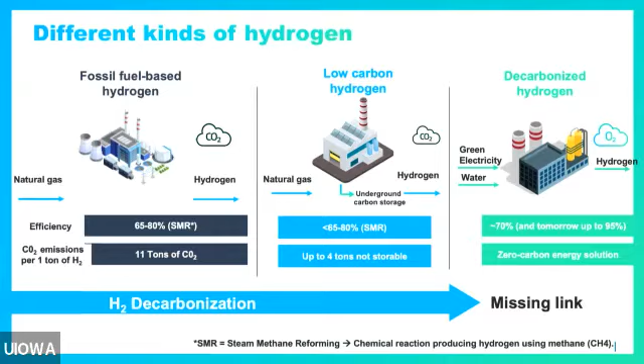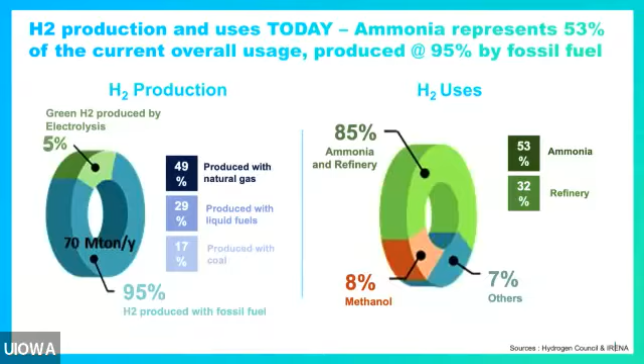So in a nutshell, if you want to easily decarbonize a part of the industry, a way to do so is to use electrolysis instead of fossil fuel to produce hydrogen in order to produce ammonia. This is what we are going to see in the next slide. Just for you to know, the production of hydrogen to produce ammonia represents more or less 1% of total CO2 emissions worldwide. It's only 1%, but still it's big numbers. I'm going to skip this slide because it will not bring a lot.

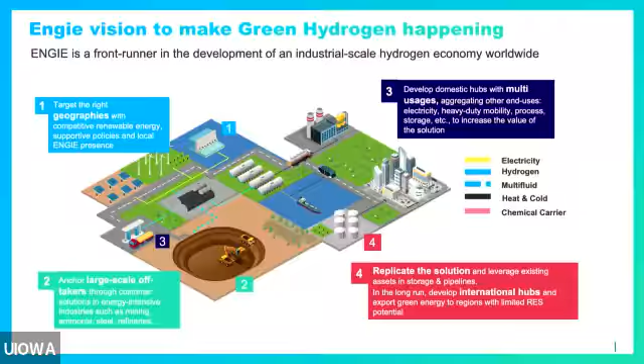So what is the idea of the project that we are working on with Yara? It's basically to take advantage of the very cheap renewables in Australia. Dampier is located more or less in the middle of a desert, with very strong radiation, so very low-priced solar and very cheap power prices. The idea is to massively invest in solar assets to produce hydrogen through electrolysis and replace the hydrogen feedstock for ammonia from natural gas to electrolysis, so from gray to green hydrogen.

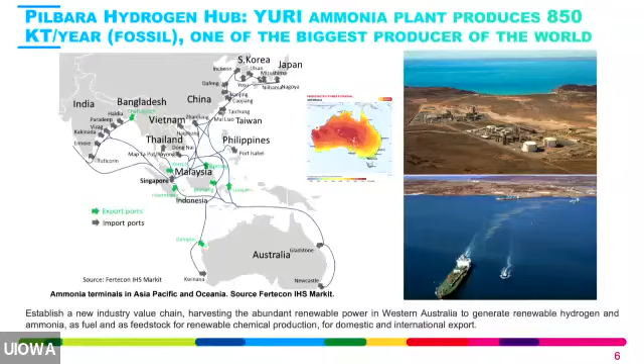So more concretely, in terms of phasing, we are currently working on a plant of 10 megawatt electrolysis. We expect to put this plant online in 2023. As you can see, in order to supply ammonia with hydrogen, it will represent only 1% of their needs at first, and the remaining 99% will still be done by SMR production. And then from 2023 to 2030, the idea is to scale up the electrolysis plant up to 1,500 megawatts, which is huge.

1,500 megawatts represents more or less the capacity of a nuclear reactor plant. So it's really huge. And so we will have the possibility to supply fully almost 1 million tons per year of ammonia in Australia. So the end point would be to avoid up to 1.4 million tons per year of CO2 in 2030.

And then, as soon as we've got a large production plant of green hydrogen, the idea is not just to sell hydrogen for ammonia, but to start building a hub, meaning that this hydrogen could also serve for heavy mobility purposes or for gas blending in the existing gas network in the region. So massive investment, massive project, and very strong impact. As you can see, 1.4 million tons per year of CO2 avoided.

Now, because it's a project in Australia, making the link with you today, the US is also a very big producer of ammonia, especially in the Gulf Coast in Texas. You've got companies such as OCI and Yara, who are big players in the production of ammonia. And they are all working on moving from gray hydrogen to green hydrogen in order to produce ammonia.

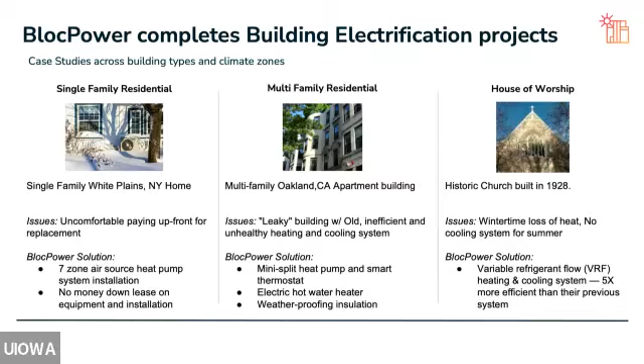And then the final example is a house of worship. So BlocPower prioritizes doing work in houses of worship because it's really an opportunity to bring the benefits of electrification to a wider swath of the community faster. So prioritizing spaces like these allows us to help folks get exposure to building electrification. And in this example in New York, we were able to install a heat pump system, which also brings air conditioning. So heat pumps can run backwards, so they can heat your home, but they can also cool it. And it allowed the church to start offering services in the summer again. So the church started having weddings in the summer again. They started having other community events because it was comfortable and folks weren't sweating. And so there are a number of reasons why people will choose to electrify, and we aim to package those benefits to individuals so that they can experience that. Next slide.

We tap into networks of private partners to drive down project costs and get support on project management. We have partnerships and relationships with Microsoft, the Bezos Earth Fund, other entities like that allow us to do more projects in more places. When we're doing our building electrification work, we really have an eye towards delivering additional value.

So one view of electrification is already what I've outlined, installing heat pumps, doing energy efficiency measures, but there's also a real opportunity to modernize our buildings by incorporating low-cost Wi-Fi into these structures. It's a way to bridge the digital divide. It's a way to bring more people into the 21st century. And it's a real added value that gets more support from the community when we're looking at enterprise scale investments. We also deliver additional value on the health front, which I'll talk about in the next slide. But there are a number of intersectional benefits that can be addressed in building electrification.

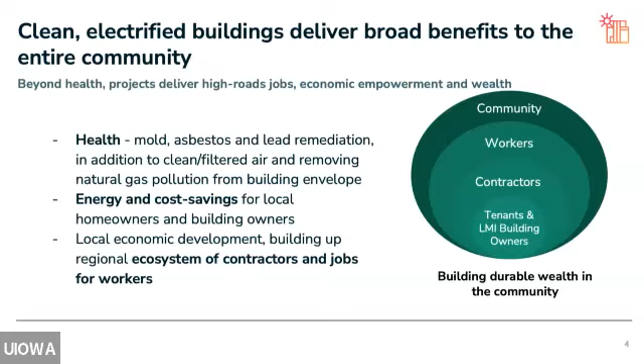Great, thank you. And then the last piece on this slide is local economic development. So right now, there's a real gap in the number of contractors and developers who can do building electrification retrofits. And so BlocPower is invested in training up the next generation of this workforce who can do these retrofits and get paid a family-sustaining job that provides a high road wage. So we really look at this as an intersectional package. We'll do next and last slide here.

So, last slide, that is what I've got. Thanks for your time today.

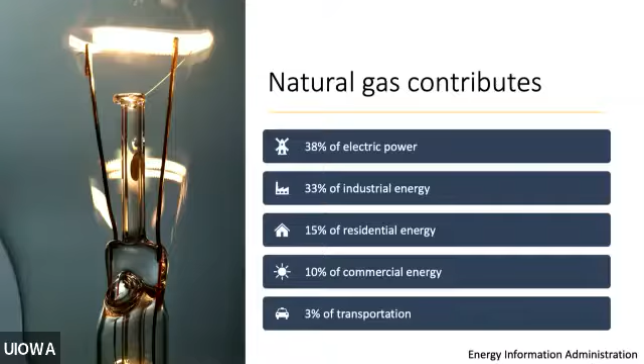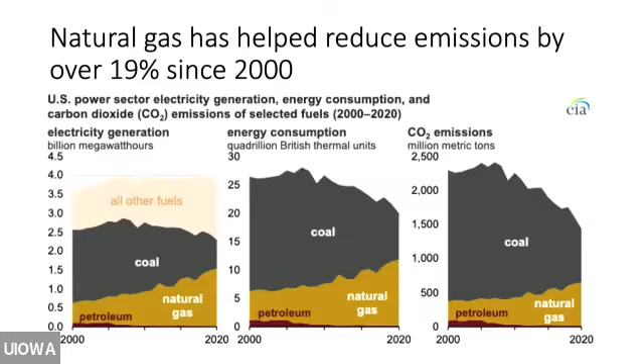With this increase in the use of natural gas, we've actually seen that natural gas has played a significant role in reducing the emissions of our energy sector. You could say natural gas has been one of the primary reasons why emissions have decreased almost 20% since the year 2000. Of course, renewables have played a significant role as well, but we can't underscore how much natural gas has been a significant part of this development.

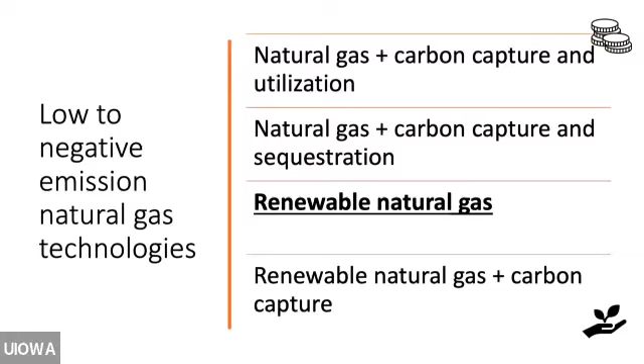On the more environmental side, but slightly more expensive, you have renewable natural gas combined with carbon capture, which would effectively be a carbon negative strategy for decarbonizing the natural gas sector. Now, the challenge with renewable natural gas, as many of you may know, is that for many years it has not been able to compete economically with conventional natural gas. That's starting to change, for reasons I'll get into in a minute.

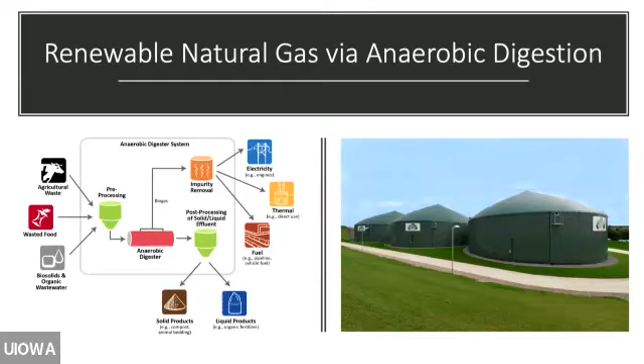For those who may not be as familiar with the technology, we're talking about digesters that can range from relatively simple to very complex reactor designs, taking multiple types of waste—ag waste, food waste, all types of biosolids—and converting it into a biogas that, once purified, can substitute natural gas in almost all applications. In addition, we get a solid and liquid digested product. That product has a lot of value for our farmland, but additionally it can contain some carbon depending on how you operate your digester, which would also provide some carbon credits, though most of the carbon credits would come from capturing the CO2, which is part of the biogas and of low economic value.

Now, what is the potential? I think this is where I hope to provide you some incentive into looking into these technologies.

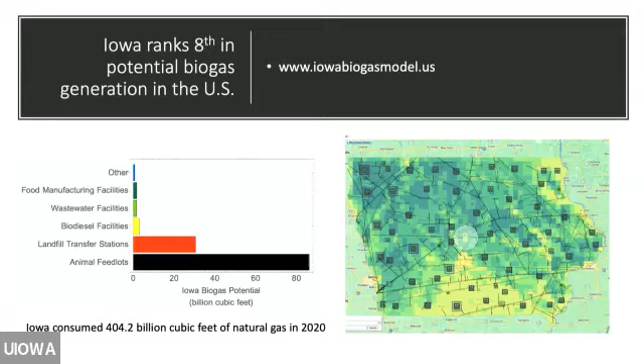Thanks to support from the Iowa Economic Development Authority, we've been working on mapping out sources for renewable natural gas across the state. If you look at total natural gas consumption, Iowa consumed about 404 billion cubic feet of natural gas in 2020. When you look at the biogas potential, we estimate that we could produce about 120 billion cubic feet of biogas from all these sources.

Granted, not all of these are easily accessible, so this is a theoretical maximum, and the actual potential might be much lower, but this just gives us a target that we can work towards.

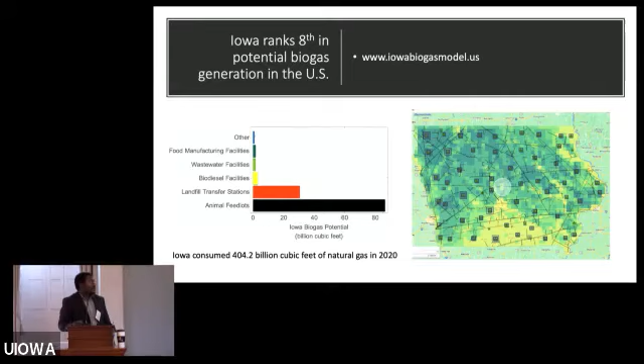The primary resource that we have in Iowa are animal feedlots, so swine manure and beef manure are sources that we could use to produce biogas today. We also have landfill transfer stations and other types of industrial and commercial facilities. In terms of its ranking within the US, Iowa is number 8 in the potential for biogas production.

But what does that translate into in terms of carbon savings? Now, life cycle analysis used to be a relatively complex and often misunderstood technique until a lot of the incentive programs made it necessary for companies and academics like myself to really dig into and understand how the emission landscape translates. In the case of natural gas, we already know that it has a lower footprint than gasoline or diesel, but it's still relatively high, about 88 grams of CO2 per megajoule consumed.

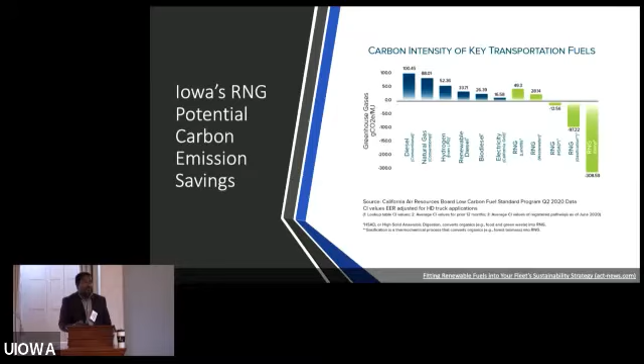As we move towards the right in the figure here, you can see that renewable natural gas can have a footprint of between 49 on the high side to negative 305 grams of CO2 per megajoule. That negative value is driven by the avoidance of methane emissions that would occur if you leave manure and other types of organic waste in the field or on a landfill. That number drives a lot of the incentive programs I'll talk about in a minute, and is part of the reason why we see great demand for renewable natural gas facilities.

Here in Iowa, we don't have as many locations where we could take advantage of that low value, but we do have significant ways of taking advantage of renewable natural gas from high solids digesters, and with gasification, we could also achieve values of about negative 100 grams of CO2 per megajoule.

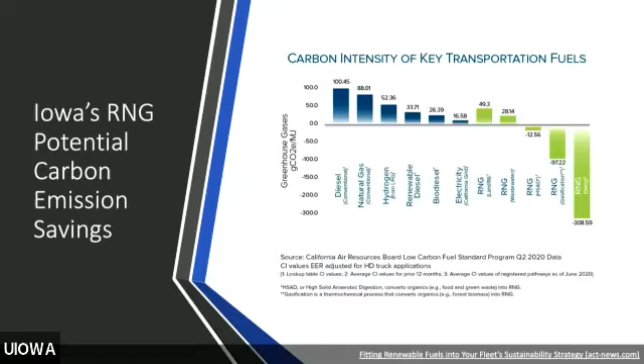So what does that translate into? We did some rough calculations based on the types of biomass that we have available. On the left side, you have an estimate for the emissions that Iowa would generate just using conventional natural gas. On the right side, you have what the emissions would be if you replace some of that natural gas with these renewable biogas resources.

What you can see here is that we can significantly reduce the environmental footprint of our sector if we were to harness these renewable natural gas resources, essentially down to 20% or less.

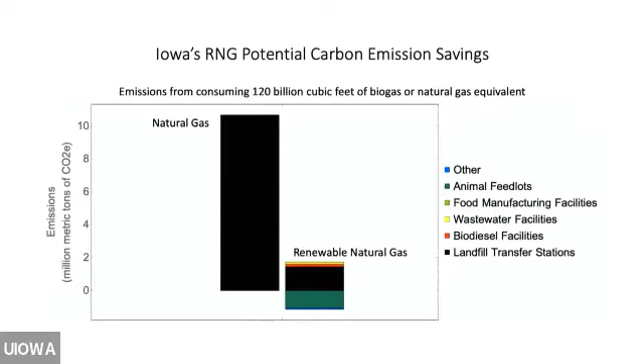This just underscores what I tried to show in the previous slide. Out of the 10.6 million metric tons of CO2 that we emitted as a state, we could reduce that significantly by more than half, just using biogas.

Now, as I mentioned, it's expensive to operate digesters. Professor Steinier asked that I speak a little bit to the economics. I'm going to speak very highly, at a high level, regarding the economics of deploying these facilities.

What's driving renewable natural gas today is that if you produce RNG from dairy waste, you can get upwards of $40 per million BTU that you produce. I don't know what the price of natural gas is today, but historically, $3 to $5, you could get up to $40 per million BTU.

Now those values again are from dairy digesters, which you don't have many of in the state, but you can still get fairly significant values from other types of renewable natural gas.

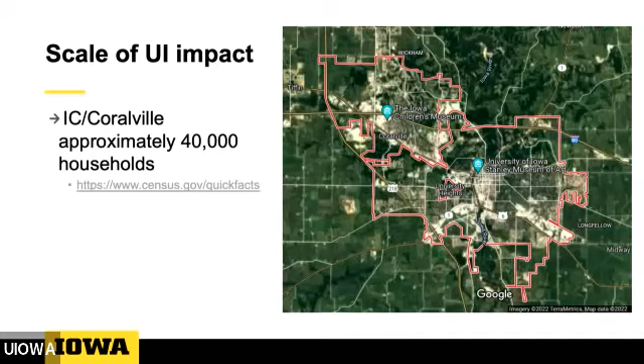To put that into context, 40,000 homes equivalent energy is the same as Iowa City and Coralville households combined, according to census data. So what we're doing really translates and could be the same as taking this whole campus in a decarbonization path, or this whole city in a decarbonization path.

This has been talked about a number of times in this morning's session and also last night by Saul Griffith. There's been a lot of focus in the past on renewable electricity, and now we're getting to the point where the conversation has shifted and needs to shift. The University of Iowa is taking a hard look at what we do next.

My numbers are a little different than some others have shared, because I tend to focus more on the Midwest—nationwide numbers are different. My Midwestern numbers say that in your average home, probably most of us, 35% of your energy use comes from electricity, while the other 65% is being burned in your furnace.

The correlation to that is that the University of Iowa campus is very similar: we use 25% electricity and 75% steam. As you look at these two pictures, the top is a home furnace, and the bottom is the steam plant at the University of Iowa, essentially the university's furnace. We're trying to decarbonize both in very similar ways.

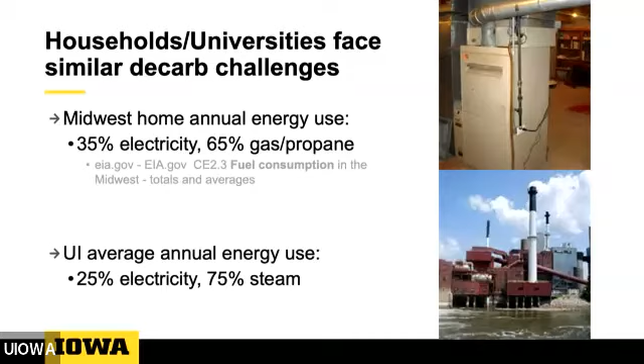We face the same challenges, which is what we want to talk about today—what those challenges might be in decarbonizing. Really, as I see it, we have two options to decarbonize, both at the University of Iowa and potentially in your home.

Mark, I did not put biogas up here. I probably should have, but the first thing that came to my mind was hydrogen, because you can start burning renewable stuff instead of natural gas, right? My view is that's a little further down the road. And I think there have been some comments to that effect, but it's not that fuel needs to be developed, but it's not such an immediate option for all of us.

And then the other option is to stop burning stuff altogether and use electricity. And I think that is the way the university is headed in the short term, maybe even the long term. But that is also sort of the idea, I think, that has come out of this conference as much as anything, is that the more you can stop burning natural gas and start using electricity, that's the next path, that's the next step. And I think that maybe hasn't been talked about enough, but we're going to start that conversation. And I think that's the way the University of Iowa is going to head.

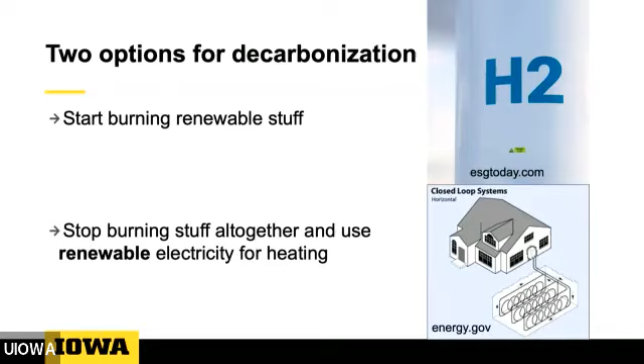So let me get into some of our history here. We have been burning renewable stuff at this campus for quite some time. Back in 2003, we started burning hulls from an oat processing facility in Cedar Rapids. And so we've been on this path for quite some time of decarbonizing. It's just recently shifted more to the electrification side.

We also have miscanthus grass on the right that we're growing. We have 1,100 acres that we're growing. And that miscanthus grass goes into energy pellets, which are the picture in the center. This is a fuel that we're using, and we still are in the process, but nearing the end of getting this campus off of coal.

I will say that those energy pellets, they are a fuel that we have chosen and I know is not a perfect option. So we'll just say that right up front. There are some hydrocarbon-based materials in those pellets, but those are things that make them a viable fuel and an economical fuel for this campus. And so that's how we're going to get off of coal, hopefully in the short term.

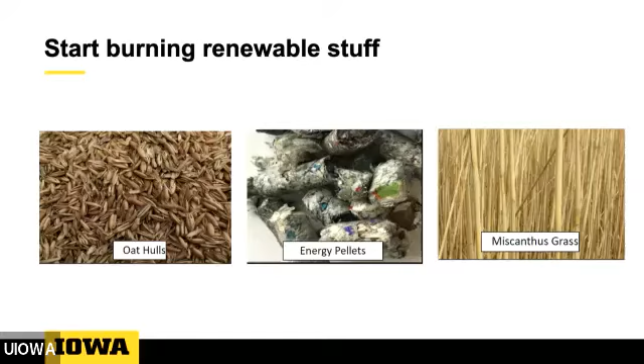From a planning perspective, we're looking now at decisions that will lead to the decarbonization of this campus in 5 or 10 years. So our focus has already shifted from a planning perspective. We're looking at how we electrify and get ourselves off of natural gas. And the great thing about some of our past decisions and using these fuels you see on the screen, that has kept us from going to 100% natural gas, which would make that job of getting off of natural gas significantly more difficult. We have many more options now because we have taken the path that we have. And so the University of Iowa is in a good spot. And I think we can be a leader and show people what is possible.

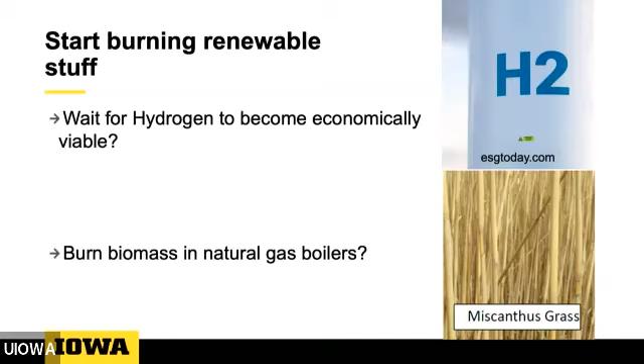In the end, I do think hydrogen will become a fuel of the future. I don't know that it will ever be something that colleges and universities will be able to take advantage of. I think we need to look more at electrification. We have better options in that place. I don't want to put the university in a position where we are in line to have to pay for hydrogen along with thousands of others who also want to decarbonize in that way. So I think we have some better options. We also have the option of continuing our work with biomass and using biomass in natural gas boilers. I think that is maybe a little further off also, so just my opinion on that.

Now imagine geothermal in your home is significantly more expensive than just replacing your furnace, right? That's one of the issues that got brought up just in the last presentation of why people aren't widely adopting things like geothermal and heat pumps. Well, you can imagine the cost difference when you multiply that by 42,000 for the University of Iowa, right? So we've got to figure out how we may be able to switch to a geothermal system economically. That's the biggest hurdle for colleges and universities going geothermal, is the economics of it.

But there are some that have done it. So you look at Ball State, they went 100% geothermal. Princeton University is on a path to phase in geothermal, as I understand, between now and 2040.

One of the things I will say too that makes it maybe a little easier for those colleges and universities to go 100% geothermal, that the University of Iowa has a little more difficulty with, is, you may not realize it, but those colleges and universities are around a third the energy footprint of the University of Iowa. We have a lot of things going here that take a lot of energy. And so one solution probably won't work for the University of Iowa.

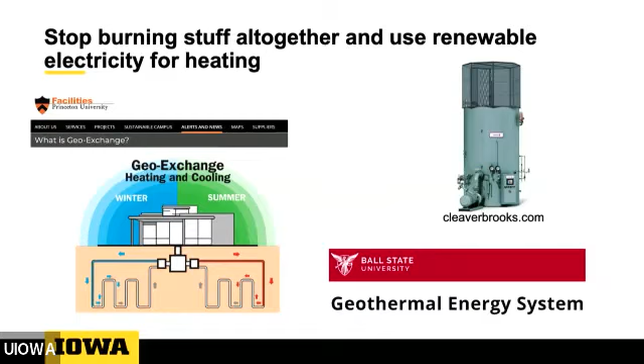It's going to be a combination of biomass, geothermal, electric boilers, all of those together we're going to need because of our size compared to other colleges and universities. So I do think that we will be looking at electric boilers. So right now, to wrap it up, we are currently on the left-hand side where we are using biomass and other fuels to displace carbon.

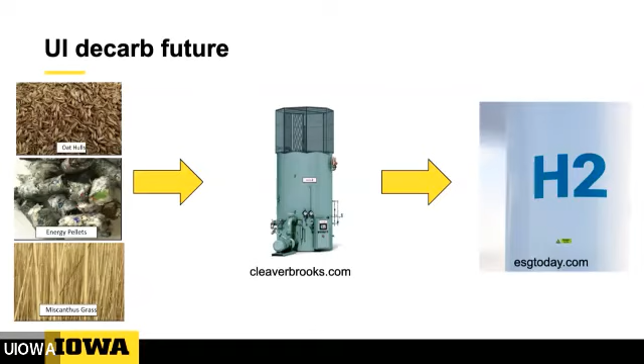I think our next step, and the things we're planning for today that will get put into effect over the next few years, will be possibly installing electric boilers to start to reduce our natural gas use. And then 10, 15, 20 years from now, if we are still burning some amount of natural gas, I can see that then may be displaced by hydrogen or biogas to get us the rest of the way to decarbonization. But I do think the electrification in the center is really the key to where the University of Iowa needs to go next. And so that's our path.

And I hope talking about that electrification here at the university will also translate then to a conversation where people think about the same thing in their homes, because it really has to happen in both places for us to meet our carbon goals. And hopefully the University of Iowa can be a leader and show that it can be done, especially on a large scale. So thank you.

All right, just thinking about time here. So it's 9:53 and the session goes till 10:15. So we have about 25 minutes for questions. I can't see the online questions, and that was my error. If any.

Great. Okay, so I'm going to kick off with the question I gave people before the session, and we're going to go round robin across all four. If you don't want to answer, you can pass. But what's one thing that students can focus on here at the University of Iowa if they found these four talks light their fire? So we'll go in order of how you presented. So Benoit.